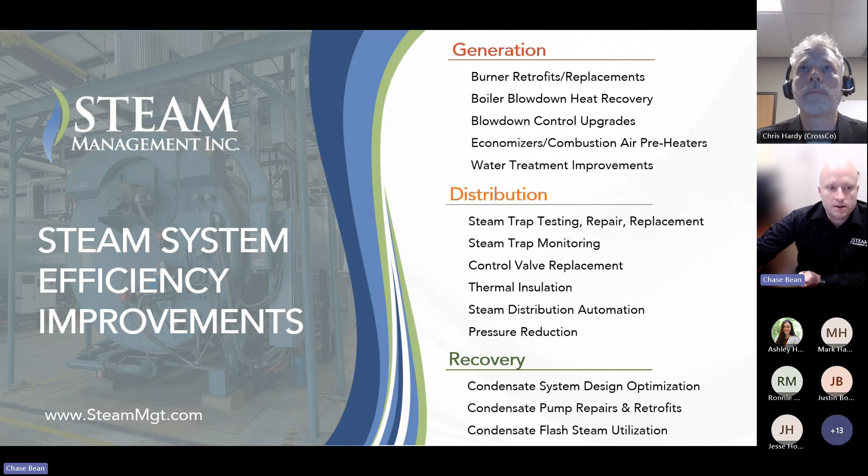We focus on efficiency improvements in steam systems and other utility systems. These solutions reduce system energy costs, conserve water, and reduce carbon footprint by an average of 10 to 30% for most clients. The opportunities shown here are common measures that we evaluate and implement for our clients, but we do look at other opportunities as well.

Today, we're thrilled to have Chris Hardy from Cross Company as our guest speaker. Chris is a seasoned principal engineer at Cross Company. He has 30 years of experience.

He graduated from Georgia Tech in electrical engineering and specializes in process controls. Throughout his career, he's been instrumental in optimizing processes across various industries, notably in boilers, pharmaceuticals, and wastewater management.

Chris excels in fine-tuning intricate processes and seamlessly integrating communication across multiple systems within units, making him a go-to expert for tackling complex challenges.

We recently partnered with Chris and Cross Company on a control valve automation and replacement project at a veneer mill in Louisiana, where we replaced 14 steam control valves with electric valves and added control systems.

That indicated steam flow at each valve using valve position and differential pressure measured at the valves. The project also included programming upgrades that significantly improved the plant's steam system reliability and functionality.

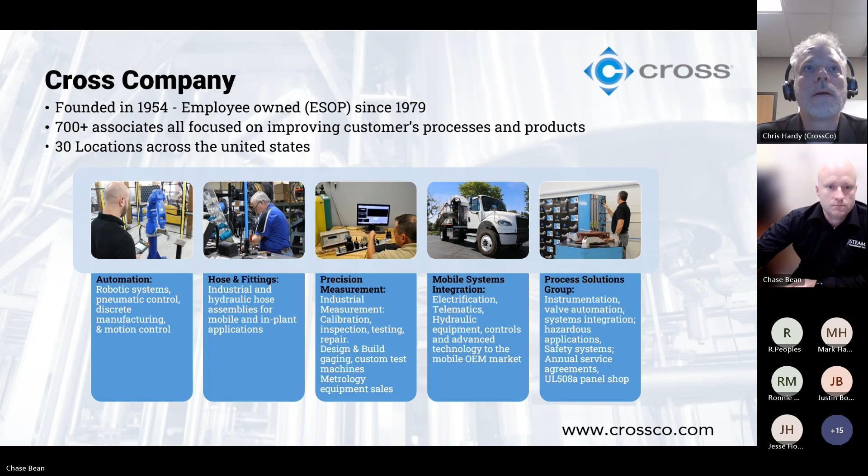This morning we're going to talk about biomass stokers. The idea with a biomass stoker is you are putting solid chunks of fuel in a furnace and boiling water.

What we hope to take away from this is to learn about solid fuel combustion and what a stoker does. We're going to talk about the traditional stoker controls for coal, which is how stokers have traditionally been used, mostly for coal.

And some challenges when you try to apply those controls for biomass, what needs to be changed to optimize for biomass.

How to balance air, how to trim O2, and then we'll wrap up with some general PID loop tuning techniques.

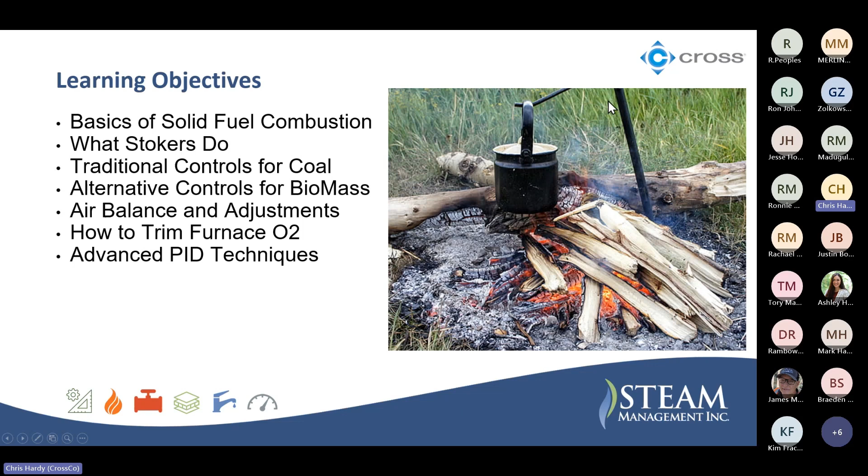So the goal again is to put solid fuel and air together, light them on fire, and boil water.

A little bit of history: the word stoker initially referred to a guy who threw fuel into a fire, usually coal. Some of us are into smoking meat, and your typical smoker, like the one on my front porch right now, is a pellet auger. There's a little fan down there, and the auger is a little screw that turns and delivers wood pellets into a little cup that burns, with a fan that blows air through it. That's basically a small version of the large boilers I work on professionally.

So many of you have actually used biomass stokers. Notice that stokers are chunks of solid fuel. If your boiler is burning a fluid, meaning a liquid or gas, or it's burning pulverized powder, that's not really a stoker. That's a different delivery method, and that's not really what I'm covering here, although probably half or maybe two-thirds of the presentation would also apply for that kind of boiler.

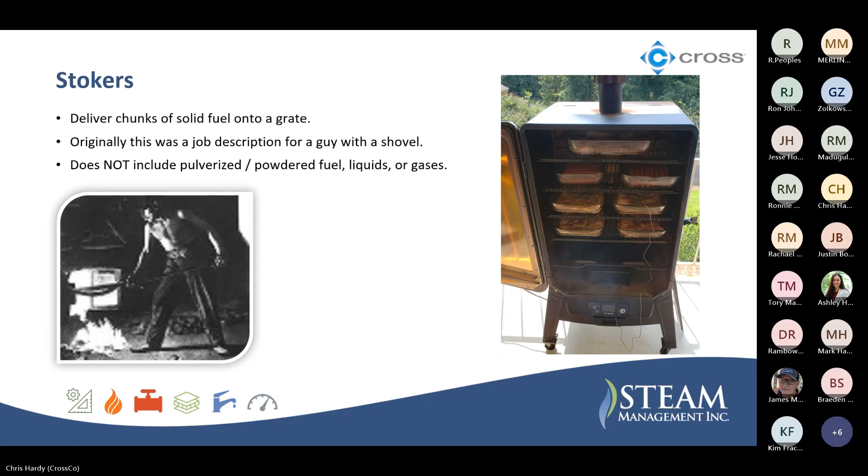One important thing to understand about combustion of solid fuel, and really combustion of anything, is that it's a multiple step process, which we can broadly separate into two sections. The first is called pyrolysis or gasification, where heat and some oxygen begin to combust the solid fuel, breaking it down and partially oxidizing it. The carbon goes to carbon monoxide, and the hydrogens and hydrocarbons break off and become hydrogen gas. Looking at the chemical structures, there's a little oxygen being added here, but not very much - it's certainly not complete. This does release some heat.

That resulting mixture of carbon monoxide and hydrogen, with some other trace gases depending on what you're burning, are the primary constituents. Those are called synthesis gas or town gas. Then, when heated and risen away from the wood or biomass, they fully oxidize if there's enough oxygen - the carbon to carbon dioxide and the hydrogen into water. That also produces heat.

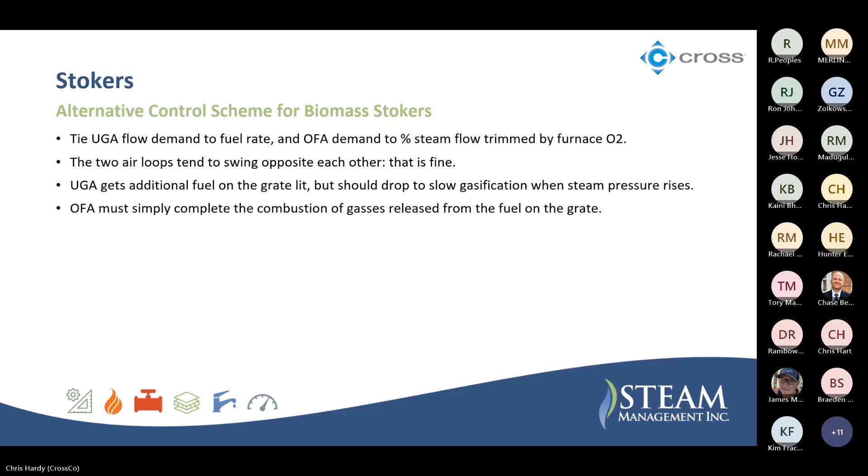One thing, because you're having highly variable fuel quality, the operator has to have the authority to make a manual adjustment between the overfire to undergrate balance. So what we do is we have a bias that is adjustable by the operator within a certain amount of percent. You might have like a -20 to +20% bias, which allows them to shift that much air between overfire and undergrate.

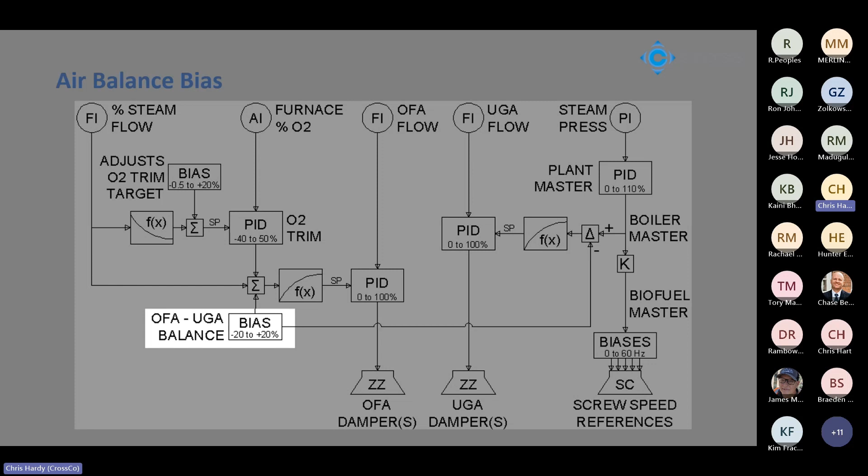And so if the fuel is lighter than normal, smaller than normal, drier than normal, you're going to need less undergrate to pyrolyze that, to gasify that, and you're going to need more overfire to complete the combustion. So they would shift the bias toward overfire air.

By contrast, if you have heavier than normal, larger, or wetter fuel, you're going to need more undergrate air to get that dried out and gasified, and then less overfire on top to complete the combustion. They should have the authority to make some amount of shift. So that's what's going on here.

Okay, let's talk about this K again. I mentioned before, this is a linear relationship from the boiler master to the biofuel master. The biofuel master just tells how fast to turn the screw augers to deliver the chunks of fuel.

However, what we need to do is actually have this K automatically adjust. And the reason is because we need a percent, like a 0 to 100% signal in the boiler master that goes to the undergrate air. And we need a 0 to 100% signal on steam flow that ultimately is the major determinant of overfire air. And those guys need to line up.

So if you have 50% boiler master, you really need your steam flow on a long-term average, say on like a 20 to 30 minute average, to be 50% if your boiler master is 50%. And the thing that makes that happen is this K being correctly set. It should automatically adjust.

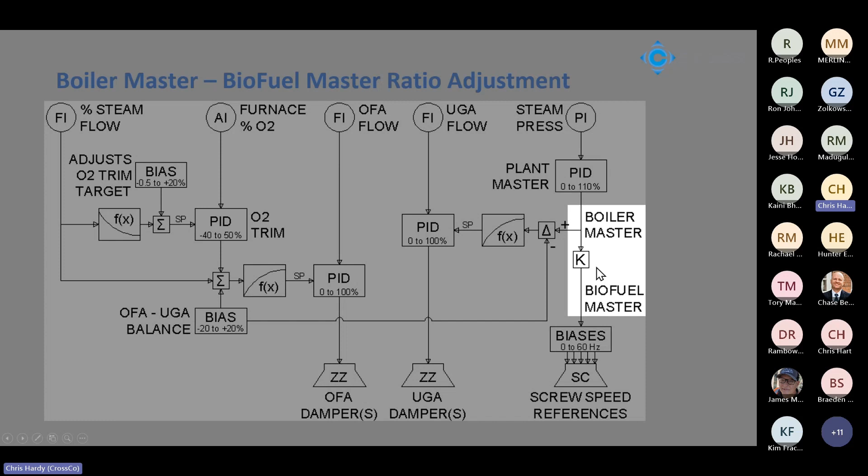And then you run that through a very long time filter, perhaps a 20-minute filter, and slowly adjust it. That filter needs to be several times longer than your cycle time. Your cycle time is typically going to be something like 5 minutes, and so that filter needs to be 10 to 20 minutes.

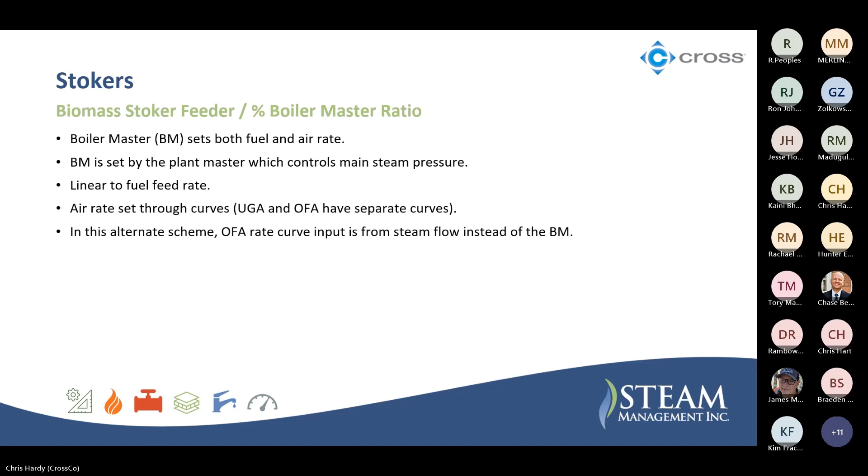So, yeah, you're dividing by the steam flow, run it through a long-term filter.

Any questions? Not seeing any in the chat, Chris.

Okay, all right, so continuing on, let's talk about the O2 trim. So what we're doing here is we're measuring the oxygen as it leaves the furnace. Again, that is a signal where it's the amount of oxygen as a percent of the gas. For the air we breathe, that's about 21%.

And then we're going to burn and consume a lot of that oxygen to do the combustion, and it will run down. We don't want to let it ever go to zero, because that would mean that we've got synthesis gas back up in the ducts. That's an environmental pollutant, but more importantly, those gases, when mixed in the correct concentration with air, are explosive, and we don't want to have explosions back out of the furnace. So we definitely don't want to go to zero.

We want to have a little bit of oxygen left over to make sure that the synthesis gases are fully combusted.

So one issue with a grate is usually a grate always has to have some method of moving the burned up material, the ashes that remain from that, down to the bottom ash collector. What happens is some of these grates have shaker motors on them, and they'll run maybe 2 seconds out of every minute, and they'll shake the grate, and the grate will be slightly tilted to run the ashes down. Other ones have walking or sliding grates where they kind of move back and forth against each other to shift it down.

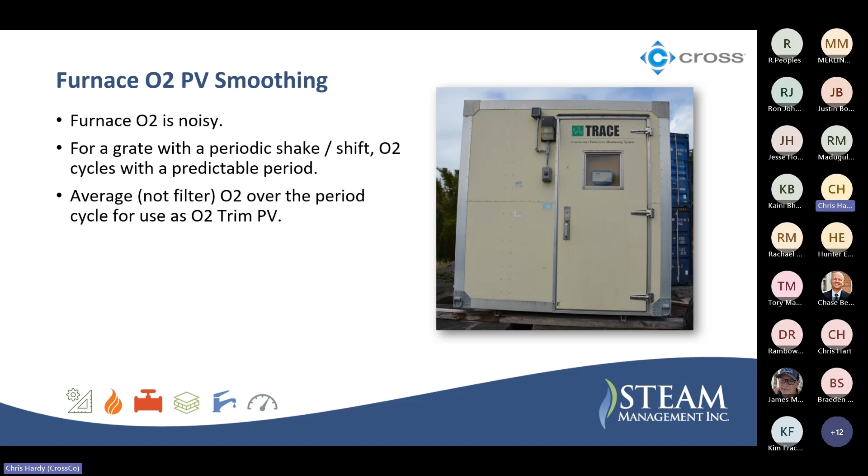So in the fixed grate scenario, you don't have to tie anything to that particular action. With shaking, you do have to correlate it to when it's going to shake — well, it's not really about when the shaking happens. If the operator says I want to shake once per minute, you'd have a cycle time that averages all the samples for the last minute. It doesn't matter where in the cycle it is, because you're always averaging one complete cycle, so your average accounts for the shake within that period without being too tight.

If there's an adjustable shake period, I'll take the period entered for the shaker and run that into a calculation that controls the sample rate. So say I have 60 samples — if your cycle is 60 seconds, you take one sample per second. But if they say they want the shaker to shake every 40 seconds, now you'd sample every 660 milliseconds instead of once per second, so you collect samples for exactly one period. That way you completely eliminate the periodic upset from the signal going to the PID loop for the O2 trim.

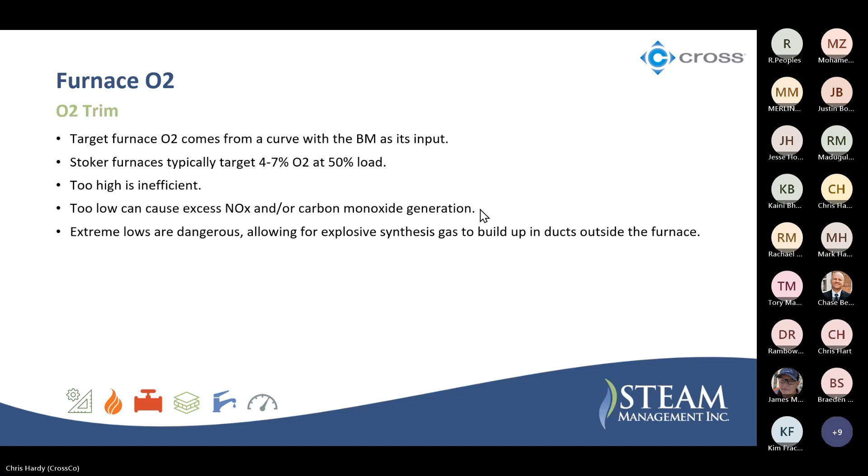One thing I should mention, let me go back to this diagram. On the ID fan, what you're doing is blowing air into the furnace, but your ID fan is usually a much larger fan, and it's pulling harder so that you have a slightly negative draft pressure above the grate. You'll have a positive draft pressure below the grate, but negative above. Typically you're running about -1/2 inch of water, so slightly negative.

However, as you move down this duct, you're going to have mechanical separators like cyclones to drop out the big ash, and then various bins and other ways of separating ash out. Perhaps there's a bag house, electrostatic precipitators, maybe the SCRs, SNCRs - I already mentioned that - possibly a scrubber. So there's a lot of things after the furnace and before the fan, and at each step, the draft pressure in that duct gets lower and lower, so more and more of a vacuum.

And if they're not tight, you're actually pulling in air at each step. So for a brand new boiler, if you've got 4% coming out the furnace, you're going to have roughly 4% going out the stack after the ID fan. But for something that's been around a while and had ash rubbing on it for decades, you're going to have some leaks, and you're going to be pulling in a little bit of extra oxygen down the road.

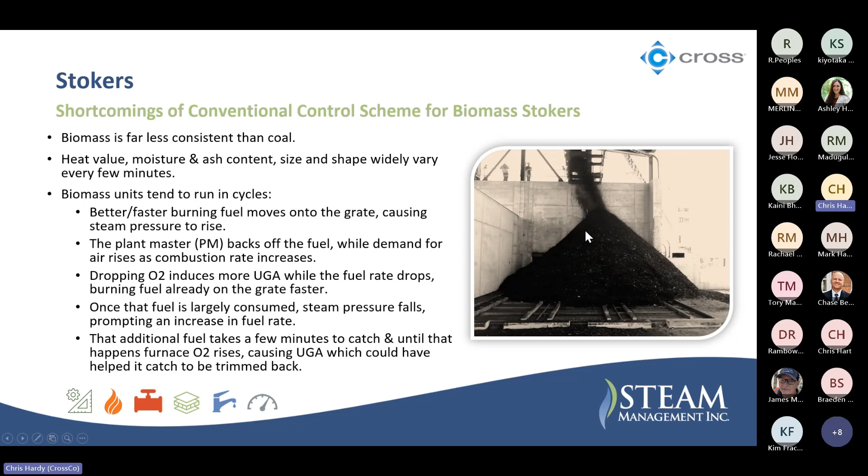Okay, on the O2 trim - the result of this PID loop on the O2 trim is, there's a lot of ways to do the math here. They used to do it where 50% was kind of in the middle, and below 50 means less air and so forth. What I like to do with modern PIDs that aren't limited to 0 to 100% is actually have 0 be nominal and have it go negative for less air and positive for more air. Then you can say, I want this to go negative 40 to positive 50. That would allow it to take air out down to 40% less than nominal, or add air up to 50% more than nominal.

And that's much more authority for the O2 trim than you typically see in other applications. When you're burning natural gas in a package boiler, you would typically only have plus or minus 10%. If you're doing coal, a lot of times it's plus or minus 20%. That's because you set those curves and they really stay pretty constant. But because our fuel is so variable, this has to have a lot more automatic authority to keep your O2 where you want it.

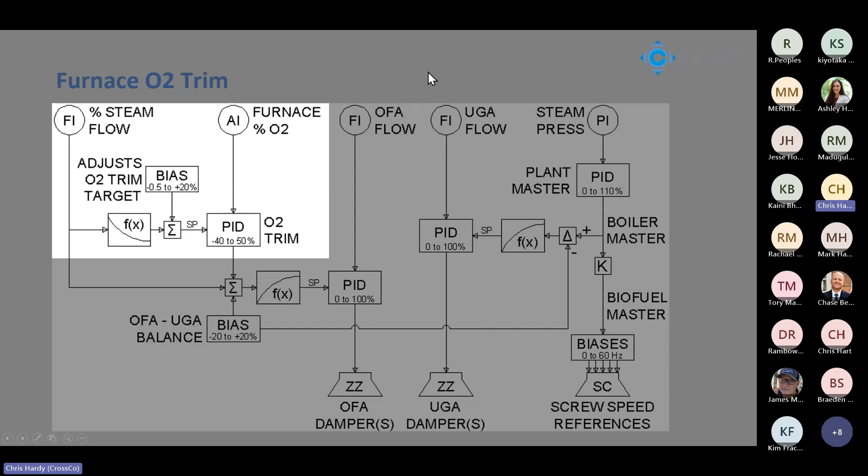Some of the O2 trim upsets are predictable, and any time you have a PID loop where there's a predictable upset, it's advantageous to use feed forward. That's basically, if something happens like the steam flow changes, then you know that your air demand is about to change, so you may as well go ahead and change your output of the PID loop without waiting for the upset. That's feed forward.

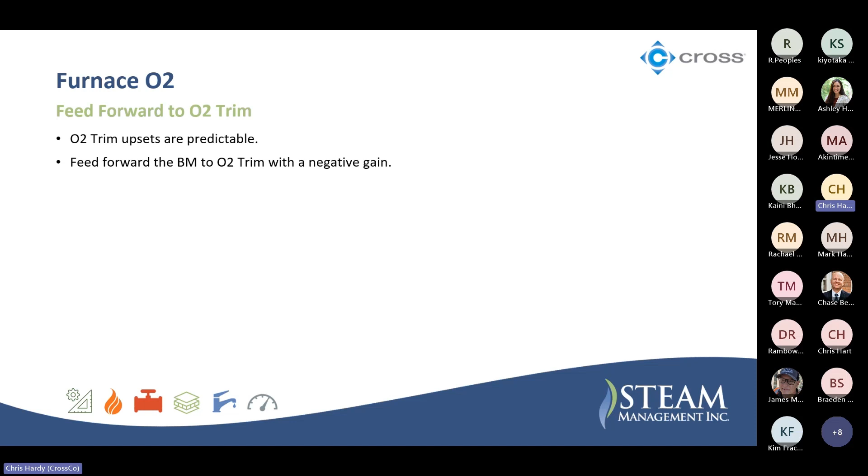So I believe we've now covered the entire diagram. We've got the air coming from the undergrate air coming from the Boilermaster - that's traditional. Traditionally, the overfire air also comes from Boilermaster, but I'm proposing that for biomass, it's better to run it from percent steam flow. We have an automatically adjusting K here to keep your percent Boilermaster and your percent steam flow aligned over the long term. They will swing against each other in the short term as the furnace cycles, but over the long term, they need to stay aligned.

These curves for O2 trim set point and your air curves - that's traditional in pretty much any boiler that has these flows, so there's nothing new there. The operators need to be able to bias between overfire and undergrate depending on their observations of the characterization of the fuel. The end goal is to spread that fireball up into the furnace so that your peak temperature is less and you have more surface area being used to transfer heat into your water in the tubes, but not so much that you don't want to contain the combustion inside the furnace.

Chris, on this diagram, when you go into these plants that have biomass boilers, where are you seeing people struggling the most? What do you have to go in and adjust most frequently? Well, the main thing is, as far as tuning...

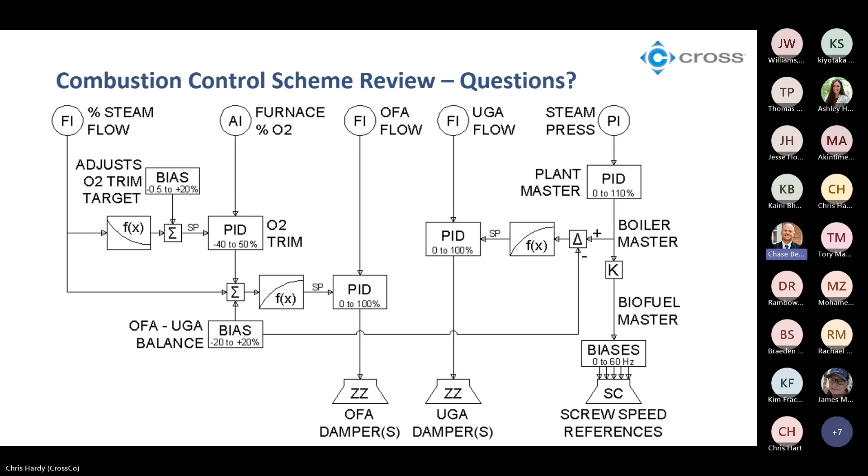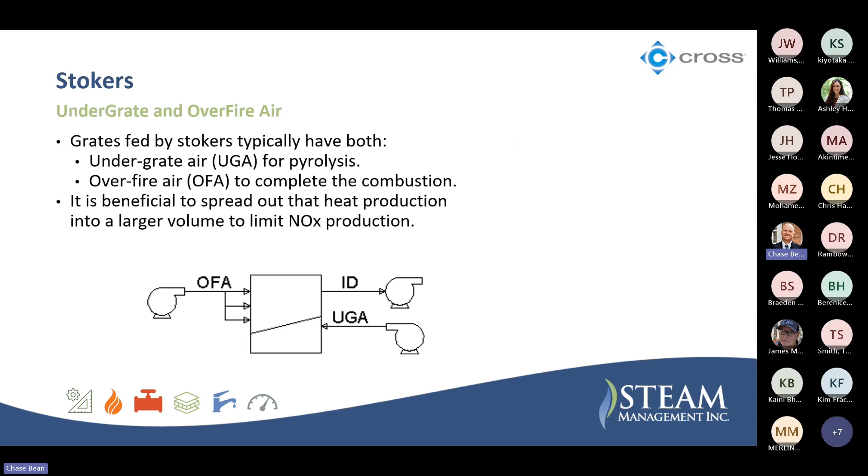There you go. Get back on slide 19 or so. Yeah, I'm going to need you to do this, I don't know what's going on. Sorry, Chief. Yeah, no problem, sorry everyone. Right, back where we were, one second. Slide 21, no, 20. There we go.

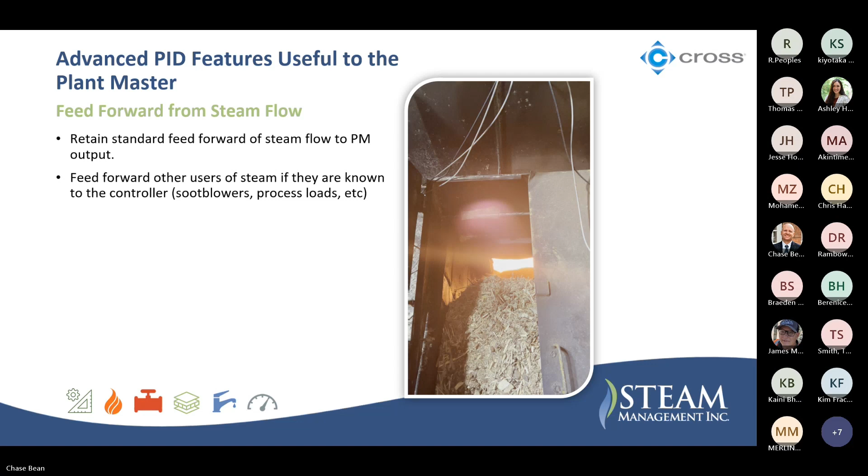All right Chris, can you see that? Yeah. Okay, go ahead and go to the next one. Okay. I guess it's the slideshow itself, huh?

Is it not showing? I'm showing your chart and talking about set point ramping and outrun prevention. Okay, yeah, it just came up. All right, so...

Okay, yeah, so feed forward. This is a fairly typical thing that we want to do. If you know what things are going to use steam, this gets to that tricky to tune plant master loop. If you know other users of steam, such as soot blowers or the actual process load for the steam, if it's not just a turbine, then you can certainly use that feed forward to the plant master.

We were talking about fuel interruptions. This is a real chart from a real biomass facility that underwent a fuel interruption. And I had put in what I call outrun prevention. So what you see is the red is the header steam pressure and the green is the set point, and the set point should ramp.

What happens is the steam started slumping because we actually had an interruption in our biofuel. So I had programmed it to have the ramping set point for the plant master never be more than 40 psi above the actual. And you can see that green followed the actual down from the interruption all the way until 1050. And you can see we suddenly got fuel back at 1050.

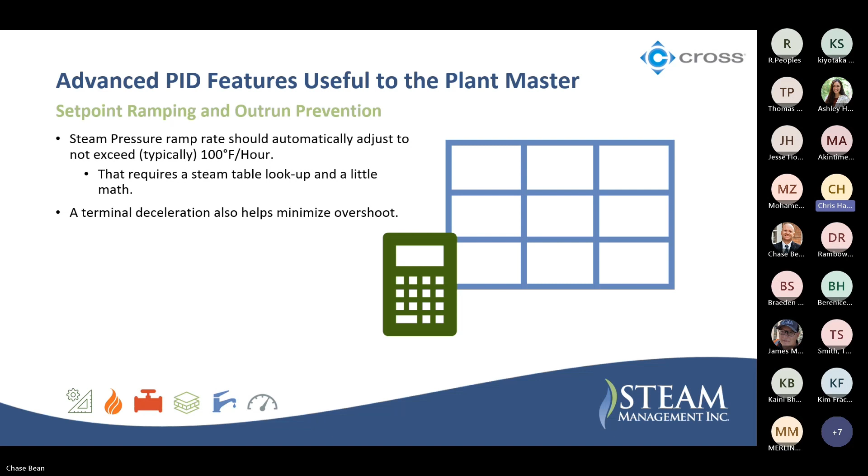So next slide. Yeah, there's that terminal deceleration. Oh, the other thing is, sorry, go back to the previous slide.

What you'll notice on that set point, the green, when we're coming back up, you'll notice that that green actually accelerates. And the reason it accelerates is I have the ramp rate as a variable, and this is a pressure ramp rate. The pressure ramp rate is tied to a steam table that looks up the temperature. What we're doing is we're ramping at a rate that causes the temperature to rise at 100 degrees per hour, which is typically the maximum rate that you want to come up to protect your refractory. So variable ramp rate on the pressure matching a temperature constant ramp is appropriate.

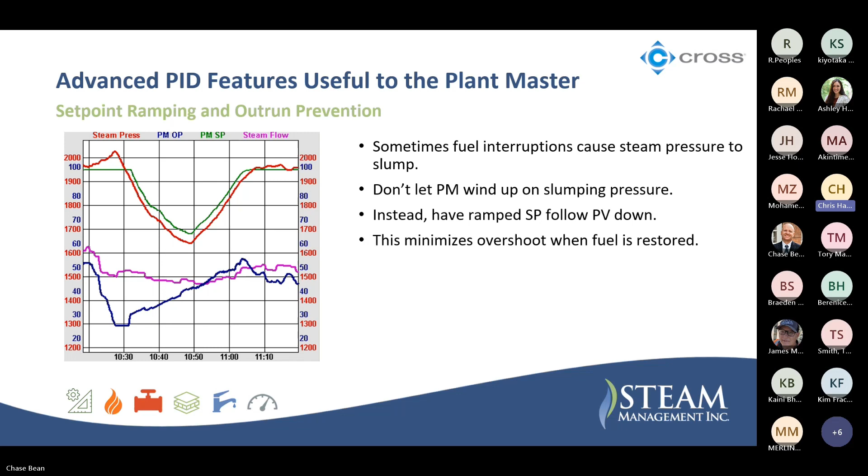Okay, two slides. Raise inhibits, yeah, very important.

So what you have here is there's a bunch of things where it's like your boiler is okay right now, but if you went up any more, you're going to cause a trip. And so for those, you want to use a raise inhibit. So if, let's say, your boiler feed water valve is 90% open, then you're done. You know, you can be here, but you don't want to go up anymore. You're going to trip out on low drum level - raise inhibit.

If your air is low, you want to not add any more fuel. If your oxygen is low, you want to not add any fuel. And what will happen is that raise inhibit applies to the boiler master, and then once it releases, then you can go up. So as your air cycles, you just want to make sure you're not going up on fuel when you're already behind on air. And you definitely don't want to go up if you're out of boiler feed water. There may be temperatures, like stack temperatures, that may cause a trip, and once those get close to their limit, you don't want to necessarily run back, but you don't want to go higher either. So that's a raise inhibit.

Hey Chris, did we address that question in the chat? Is there typically a difference in how it is run up to get up to heat versus keeping it steady in the control loop?

Oh yeah, sometimes people will do dynamic tuning where you have different tuning settings. I typically don't do that, because what I like to do is always be in control, so you never let your controller go to 100%. If your ramp rate is so fast that you're asking for 100% fuel, you're ramping too fast to be in control, and you're almost guaranteed to overshoot when you get there. In that case, if you're really in a hurry, you could use higher proportional action to mitigate that. But I'd rather just slow the ramp down, take your time, be in control the whole time. If you do that, you can use the same tuning settings for the ramp and the steady state.

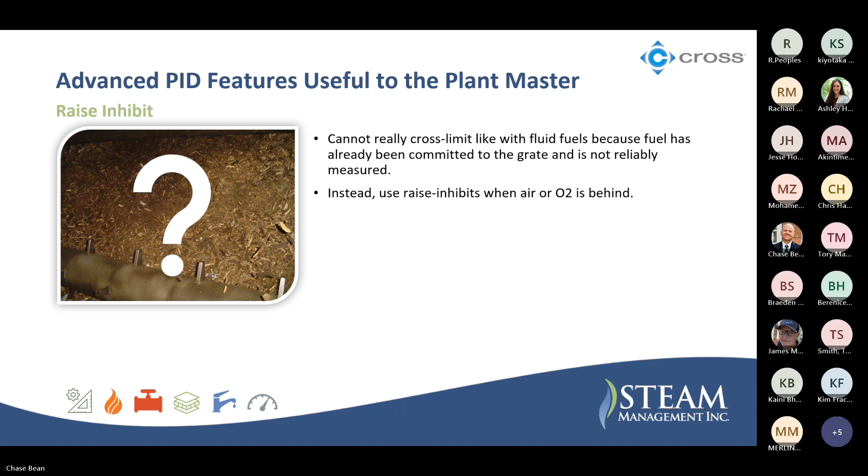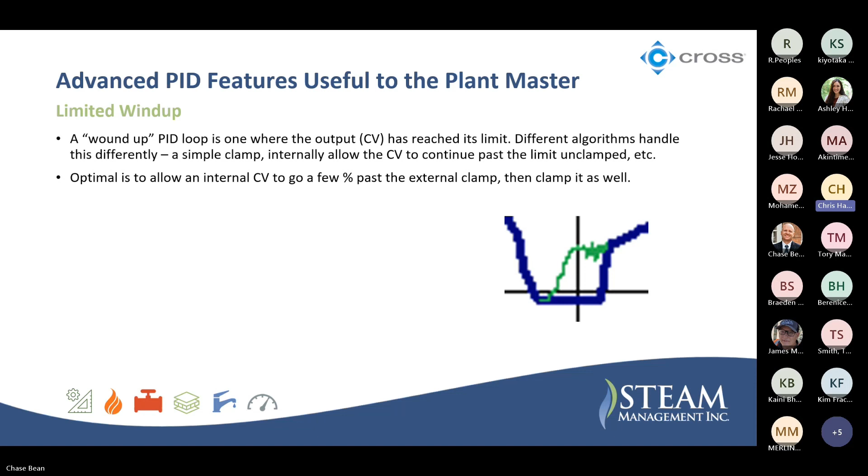Yeah, same thing there, let's move on. I don't think we really have time to get into limited windup. That's a somewhat complex topic, so let's skip that.

I'm on auto manual dependencies. Are you seeing that? Okay, there it goes. So basically the idea here, and this is a general thing that applies to all boilers, is if you have a cascade and the slave is not in cascade, you want to make sure the master output tracks the slave set point. This is generally applicable. Like if your boiler master, if your fuel screws are in manual, your fuel master and boiler master should track the screw speed so that when you put it in auto, there is bumpless transfer. It just picks up where you left off.

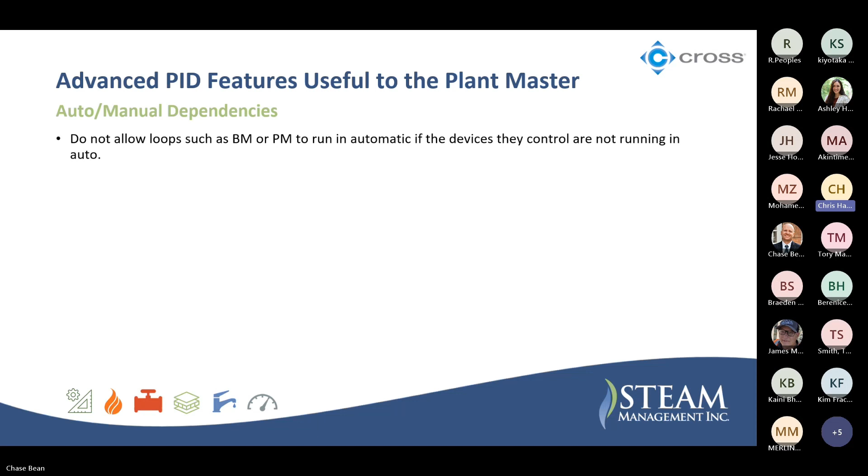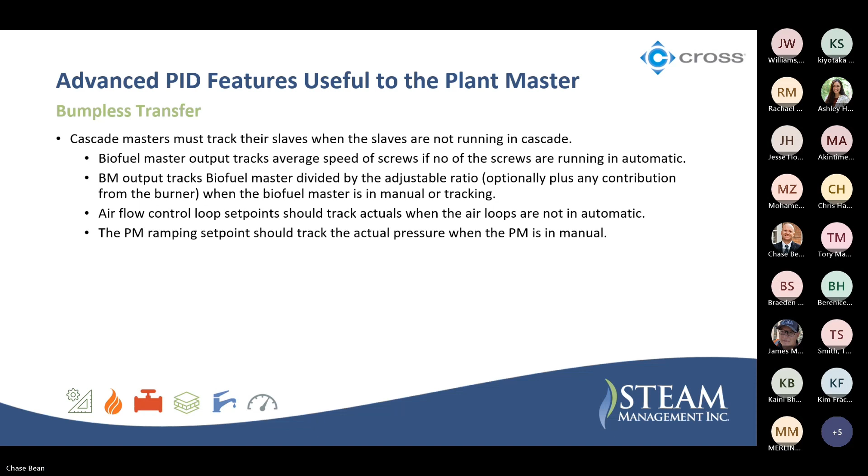Bumpless transfer, yeah, that's the same thing we just talked about. This is more details, and you can look at the details later. But the idea is here's a list of situations where you might have cascade, where the slave may be in manual.

Yeah, you want to run back. I mentioned raise inhibits before. There are some situations where you actually really do need to run back. Sometimes there's an area, and this really needs a proper HAZOP review, but there may be situations where you don't actually have to trip the boiler, but the situation is bad enough that you definitely need to reduce load to no more than 40%. So if your overfire air fan trips, for example, for some boilers you just need to trip the whole boiler. For other boilers, it may make sense to run your load down to 30 or 40% while you get that fan restarted, but you don't necessarily have to trip the boiler. That would be a run back example. You may also want to run back if your O2 goes low — maybe for the first minute you just run back your fuel rate, and if you can avoid a trip by doing that, then that's good. Again, this requires a proper HAZOP review, so whether you even want to do that.

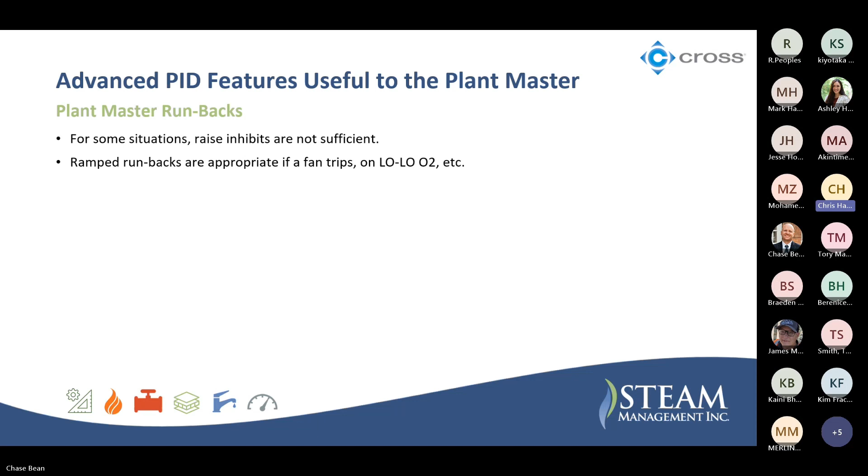For stokers, VFDs, typically you don't want to run a VFD lower than 15 hertz, which is 25% speed. If you want to run 5% load, but your screws won't run less than 25%, you don't want to stop some screws and run others — you want even distribution over your grate, so you want to run all the screws. But what you can do is run all the screws for say 12 seconds out of every minute, or 6 seconds out of every 30 seconds, at their minimum 25% speed, and that will give you overall an average of 5% load. That's an effective way to run at very low loads — you wouldn't want to do that continuously, but it's very helpful on startup when you're first coming up.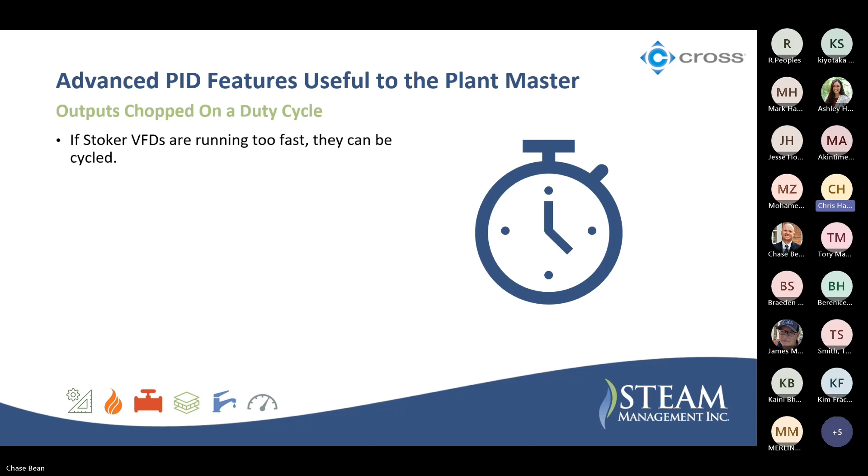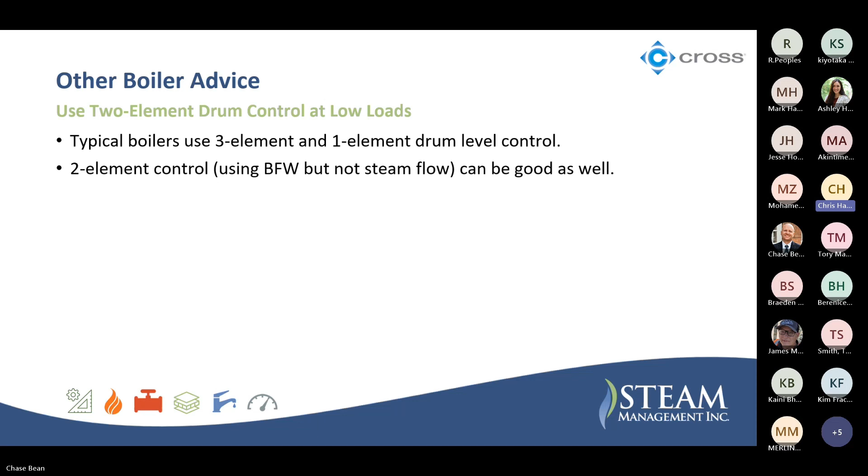Modern controllers should have steam table curves built in. Anytime you have a saturated steam pressure, like your drum pressure and your header pressure - definitely your drum pressure, and your header if you don't have a superheater - you should be able to calculate the temperature at that point and display that for the operator as well. That's often useful information. Same is true for soot blower pressures, as that's typically saturated.

This came up in our Zwali project. We were measuring steam flow across the control valves and needed the properties of the steam. It was saturated steam, so we took the upstream pressure measurement, and we were able to get all of our densities and everything else we were using from that, and then calculate the flow across the valve. So yeah, these advanced controllers have a lot of capabilities, and let's use them.